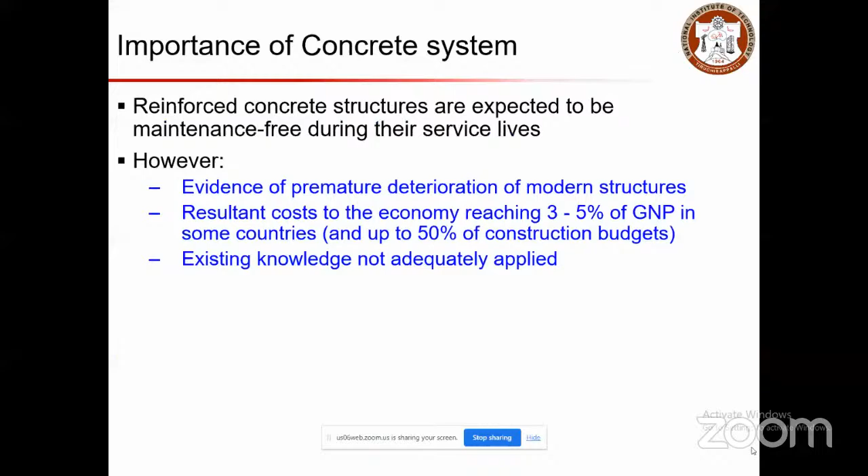Notification from one of my friends saying that it is not being moved.

So in the concrete system, when we talk about reinforced concrete members, the rebar will be placed inside the concrete. We typically cover the rebar like this, placed inside the concrete, and then you have your concrete placed here. The concrete is going to basically cover your rebar, and that is why we call this region the cover concrete.

Depending on the severity, you vary or increase the cover depth, because if you increase it too high, then it is not good for your concrete. Why? Your concrete is weak in tension and good in compression. So as you increase the depth, that concrete region may not withstand the tensile stress, then you may end up having a lot of spalling in the cover concrete region itself.

So when the cover concrete region spalls, that is going to expose your rebar to the outside environment, and then the aggressive agents would react and affect your rebar to induce durability issues. That is what is being illustrated here.

So this dotted line basically indicates the region that is outside. Here you have the concrete surface. This is going to be exposed to the region where your concrete may get dry, and the water inside the concrete mix may get evaporated over time. At the same time, from the outside environment, you may have ingress of aggressive agents like chlorides, water, or carbon dioxide that can come in and react or attack your rebar.

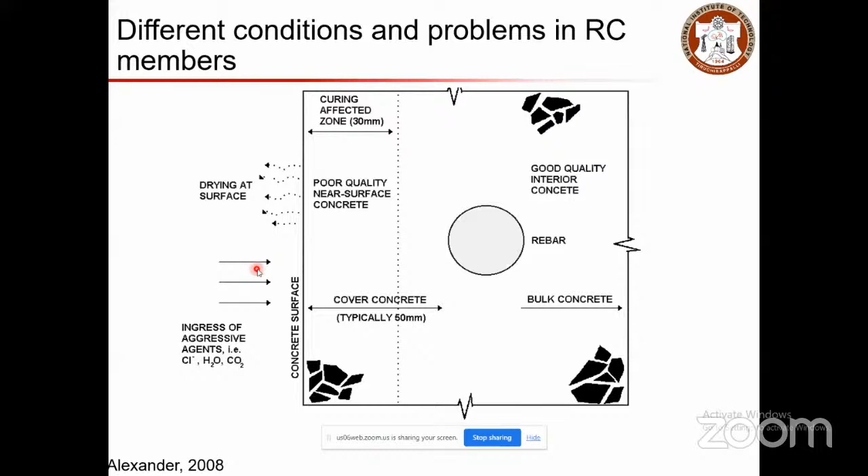Inside we typically call it bulk concrete or core concrete, which will have good strength compared to the cover concrete. So we need to understand that irrespective of region, out or in, the quality of the concrete should be good. That can only be achieved if you provide adequate curing to enhance the performance for sustainable structures, and good quality materials should be used.

Which helps you achieve the required conditions. So we can divide into two categories. One is the concrete system, which depends on materials - the type of binders or cement contents, aggregates, admixtures, and of course the mix design and proportions used to achieve the target goal. At the same time, the process used to mix your concrete and transport it from one place to another, compact it, curing, temperature, and workmanship - everything will have its impact on performance.

When you consider the environment, we can categorize into two categories: physical and chemical. Physical conditions could be due to abrasion, erosion, cavitation, and freeze-thaw cycles. Chemical conditions involve dissolution, leaching, expansion, and alteration. This is because of the aggressive agents that get into concrete, which may result in these various conditions.

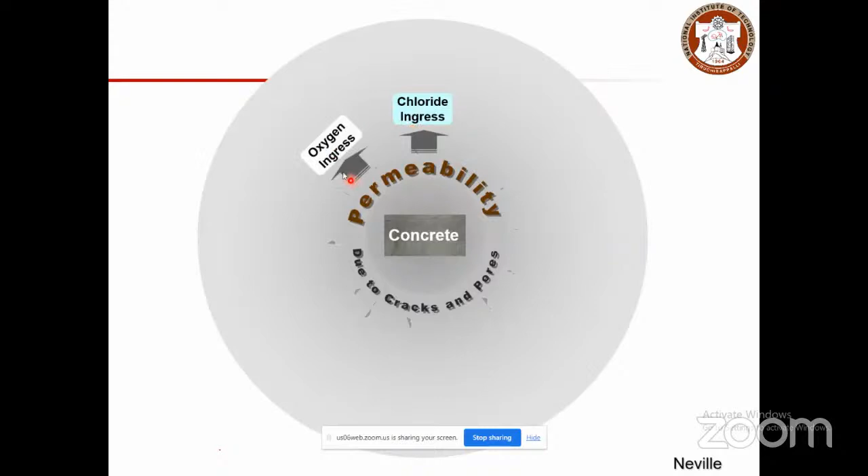So when you talk about concrete, this is from the book. Concrete structures are all porous - it is a highly heterogeneous material. The pore connectivity will lead to permeability, and if the concrete cracks, you can see mild crack formations. If the concrete cracks, that may lead to chloride ingress and oxygen ingress to your material, and then depending on environmental conditions, you may have saltwater penetration, carbonation, and water saturation.

These are external conditions. And if you talk about the pores and cracks, the materials that you have may have some alkali content in cement, and may also have some inferior ingredients that we use in concrete.

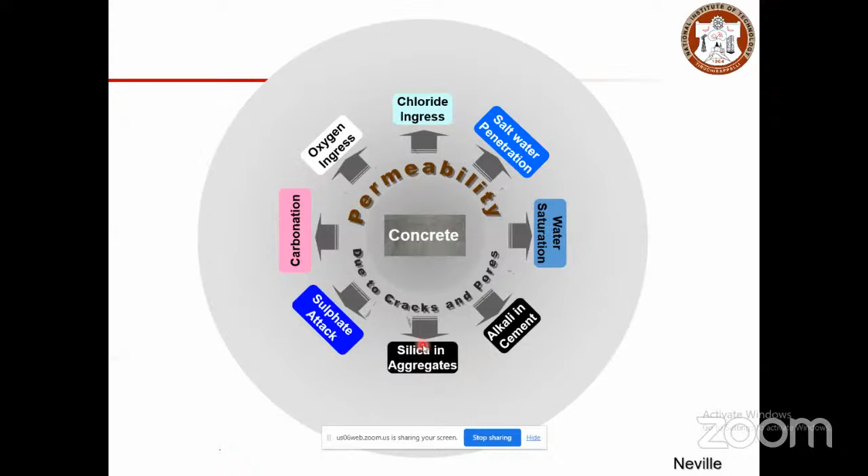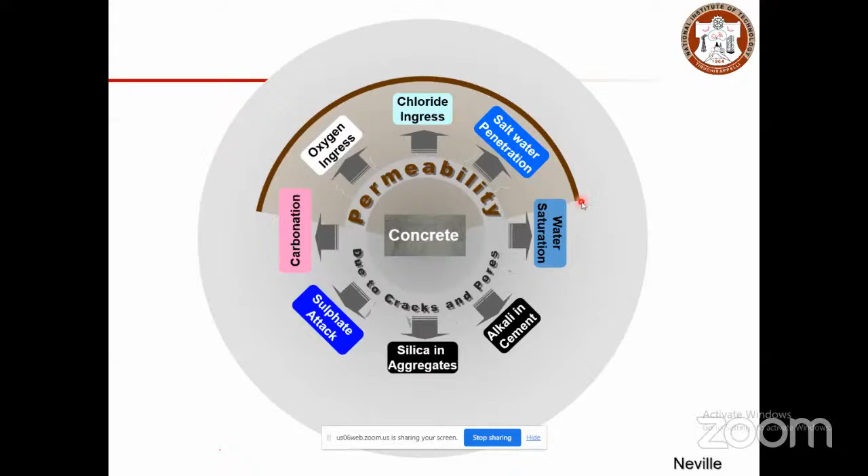So the cement will have alkali in it. The aggregates may have silica in it, and depending on the favorable conditions, you may end up having a sulfate attack as well. So these things, when you have the combination of oxygen ingress, chloride ingress, salt water penetration, carbonation, that may lead to corrosion issues.

Whereas if you look at the water, alkali, silica in these combinations, this may result in alkali aggregate reaction, ASR conditions. On the other hand, if you have only water saturation, that may result in leaching, and when you have sulfate attack, that may result in concrete expansion, and eventually that is going to crack your matrix. So the cracking will be there, and that is going to result in strength loss, and once that is lost, the material is going to slowly deteriorate.

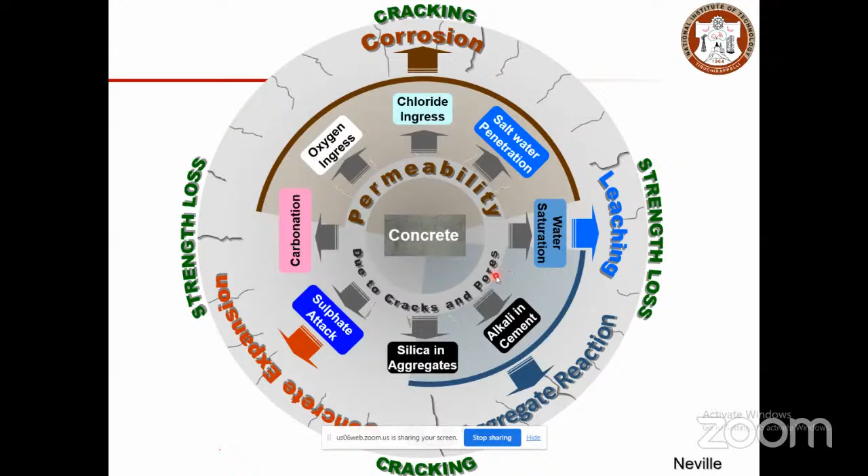So what is the common cause of deterioration in materials? Sometimes we are not so aware. This is from Professor Basheer, UK. Based on the findings, about 33 percent of the major contributions are due to corrosion effects. External chlorides induce deterioration, and the rest were mainly contributed by shrinkage effects, corrosion due to carbonation, alkali aggregate reactions, abrasion and erosion. So the major causes would be corrosion due to external chlorides, corrosion due to carbonation, and corrosion due to inbuilt chlorides. That is going to influence the durability performance a lot.

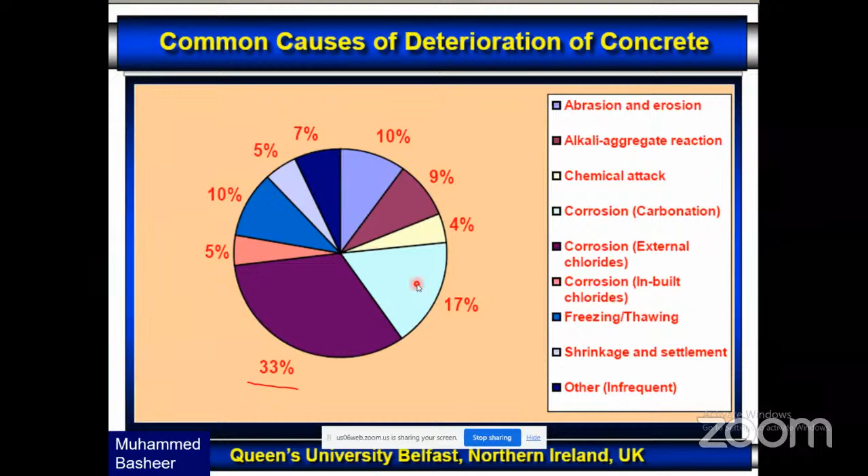So you might have observed in your day-to-day life the structures that surround you. Corrosion will be one of the common issues that you can find. So what are the factors that contribute to such concrete deterioration?

One is low cover. Typically, to save material, people don't provide adequate cover as required for a particular scenario or condition. When you tend to provide low cover considering cost and other factors, you may save cost in the initial stage, but at the end, when you look at the overall life cycle or lifespan of your structure, you may need to spend a lot of money at certain intervals to enhance the performance. So low cover is not good, you need to provide adequate cover. Low cover or high cover, both extremes are not good. You need to know what is the adequate cover for the particular scenario, and that needs to be provided.

And then poor quality concrete, poor design detailing, poor workmanship, wrong specifications, failure of joint waterproofing, and wrong material selection. All this is because of the awareness that we have with our design people or site people, and the workmanship.

So the designers will think this will work, but when it goes to the site, the site engineers may not be knowing what exactly the designer thought and included, and there will be a compromise in the performance. Especially at the end, who is going to construct it? The layman is going to do construction, and you may observe that if the concrete is not flowable, the layman doesn't even think, he just pours water to make the concrete more flowable, but he doesn't know what he's doing. That is going to change the entire material composition and design, and that is going to affect the strength and durability of the material. So at the end, it is in the hands of the people who are going to do the construction. That's where the major issue comes: poor workmanship and wrong specifications.

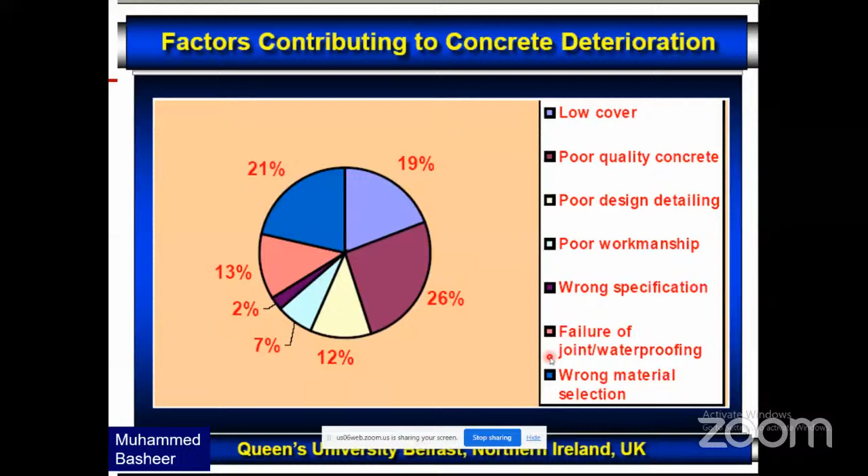So what do we need to consider? We need to choose a balanced approach to enhance the service life. When you talk about the balanced approach, we need to take care of steel. Of course, we are thinking that the steel is being taken care of by the cover concrete, by covering the concrete on top of it. But we are not taking care of the cover concrete. So when you need to look at the service life, it has to be balanced. You need to take care of the steel as well as the concrete.

So the steel with enhanced resistance against corrosion, and the concrete, that is specifically the cover concrete with enhanced resistance against the ingress of deleterious elements. So this is what's considered synergetic effects to look at.

So why concrete? You might be curious to know why concrete is used tremendously in construction. That's because the price of concrete is one of the cheaper materials that serves all purposes. This is the range given, showing annual production in tons per year, ranging from titanium, aluminum, steel, wood, bricks, to concrete. So concrete production is enormous, and the cost is also less.

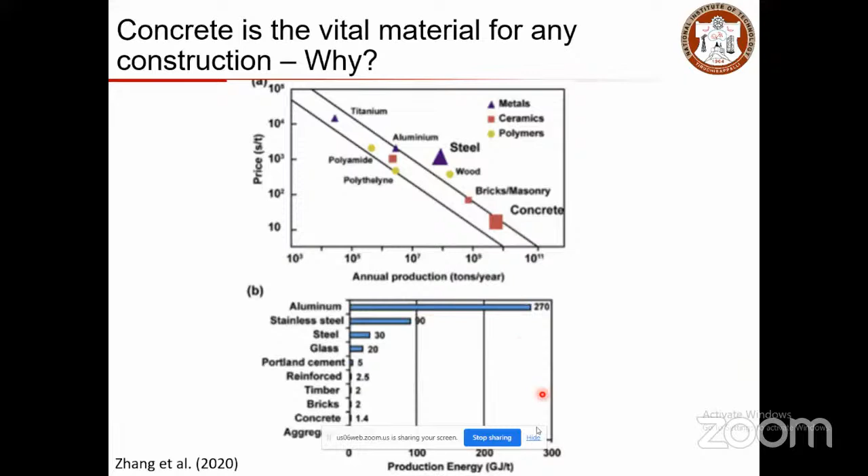If you look at the energy required, it's also less compared to other materials. So the thing to note is that...

to produce concrete, you need to have cement. The cement demand across the globe is given here. You can see the prediction over the decades, ranging from 1990 to 2050. China is the highest cement producer, and then other developing countries together contribute to this demand.

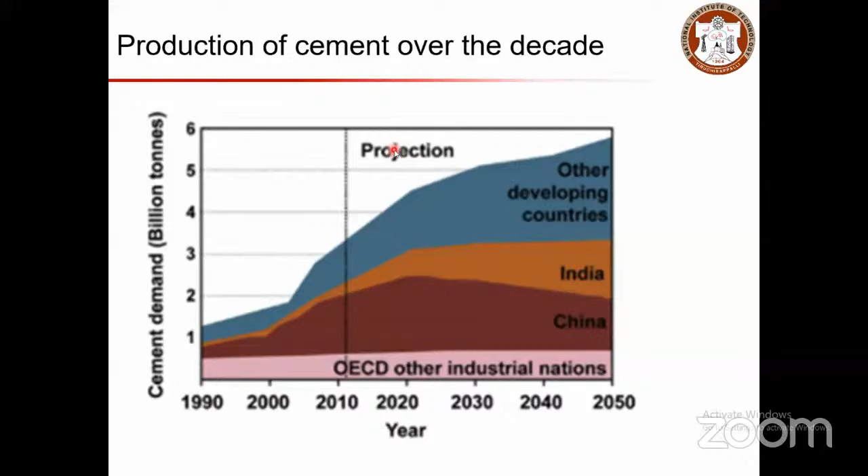So the point here is that cement production is enormous, and likewise the CO2 emissions from cement are also enormous. When we talk about the attributes of concrete, it is the second highest consumed material next to water. So imagine how significantly we use concrete in all our structures, and the amount of cement that goes in, and the CO2 emissions associated with it.

This is why sustainability is being discussed - how well we can reduce CO2 emissions from cement and make the material more sustainable.

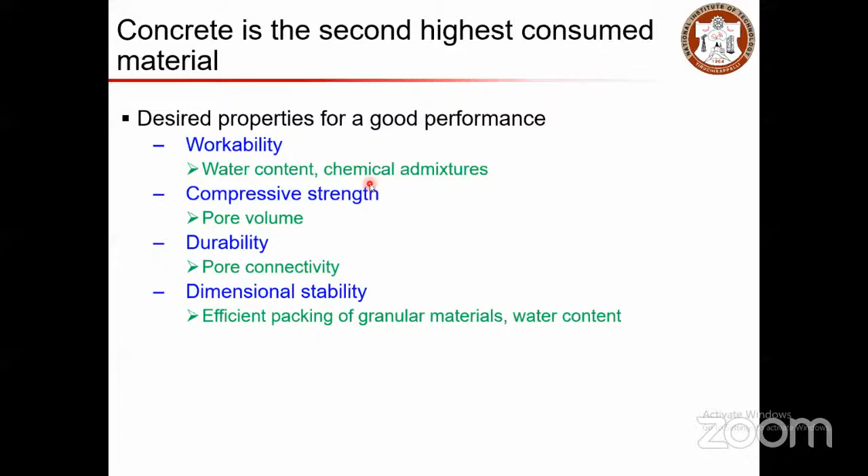So what are the desirable qualities? You need to enhance the workability of concrete. For any concrete to perform well, the fresh property is workability, and then compressive strength, durability, and dimensional stability. These are the primary properties of concrete.

To adequately develop infrastructure, concrete has taken various forms - ranging from normal concrete, to high performance concrete which increases strength, and ultra high performance concrete where strength can be tremendously increased so that the size of the member can be reduced to save load and cost. Then we have precast concrete systems, self-healing concrete, and 3D printing concrete.

And what about reinforcements? In reinforcements also we have various evolutions, starting from conventional steel rebars, then coated steel rebars, then FRP bars and strands, and pre-stressing strands.

So normal strength concrete - I don't need to give you any definitions, you might already know what normal strength concrete is. So I'll focus on high performance concrete. You might be knowing what supplementary cementitious materials are, right?

There are materials that possess certain characteristics of reaction in the presence of water that produce a hydration product similar to cement. This is what we call supplementary cementitious material, and the whole reaction is what we call pozzolanic reaction. The material that attributes this pozzolanic reaction is called pozzolanic mineral admixture, such as fly ash, GGBS, rice husk ash, silica fume, metakaolin, and POFA.

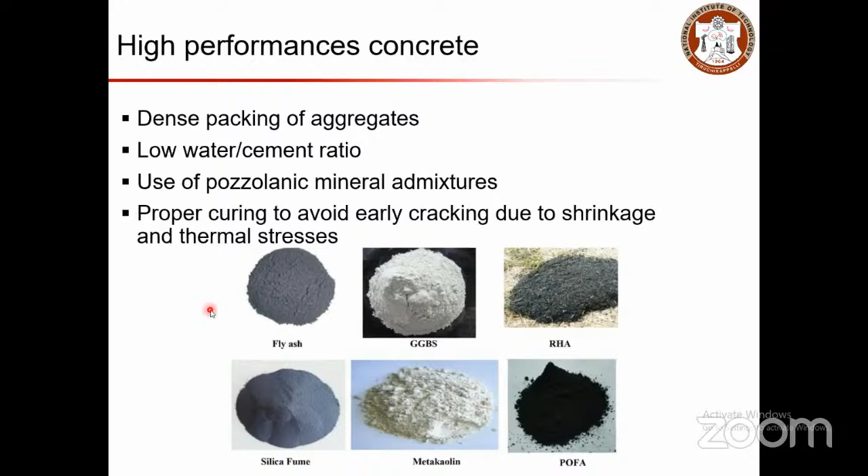The advantage of using such materials is that some are finer than cement particles, so they fill in the pores and help you get a densely packed structure. Some materials react with the calcium hydroxide in cement and produce additional CSH, which helps with pore refinement and a denser matrix. This requires proper curing to avoid early cracking due to shrinkage and thermal stresses, because when you use such materials, that needs to be taken care of properly.

Then you have ultra high performance concrete, which is based on cementitious composite material with certain discontinuous fiber reinforcement placed. The strength is typically in the range of above 120 MPa.

Nowadays ultra high performance concretes are being used enormously for constructing high-rise buildings, so the size of the members can be reduced significantly when you move with UHPC, helping to reduce the overall dead load of the structure. The pre and post cracking tensile strength would be above 10 MPa, and this gives enhanced durability, because as the strength increases, the stiffness of the material also increases, and the material behaves more stiffly.

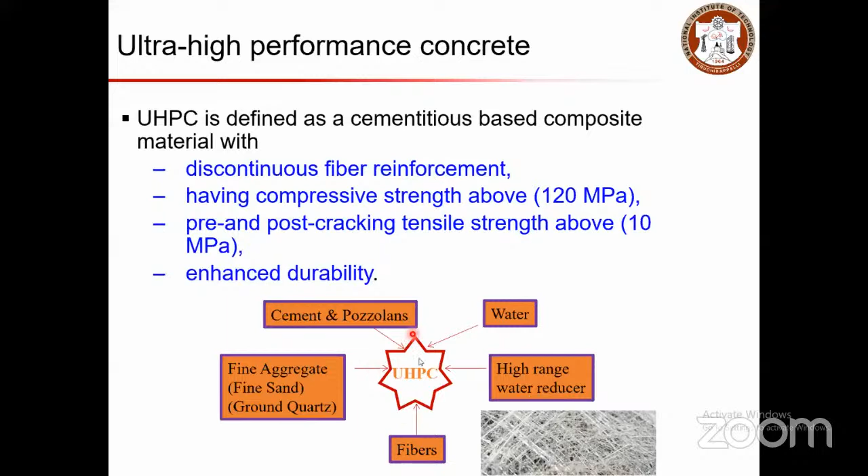Adding fibers helps bridge the cracks and enhances the toughness of the material. That combination helps achieve ultra high performance concrete, typically a combination of cement, pozzolans, and water. To achieve high strength, the water-cement ratio needs to be lower, so you need high range water reducers and fine aggregates. You typically reduce the coarse aggregates when going with high performance concrete, and add fibers to enhance quality.

Let us compare the performance of conventional concrete, high performance concrete, and ultra high performance concrete. The strength for conventional concrete is in the range of 20 to 50, for high performance concrete it is about 80, and for ultra high performance concrete, such as reactive powder concrete, it is about 200 MPa.

Flexural strength is 2 to 4 for conventional concrete, 7 for high performance, and ultra high performance concrete is about 10 times the conventional strength. Modulus of elasticity is in the range of 30 for conventional, 40 for high performance, and about 60, twice the conventional value, for ultra high performance concrete.

These structures are very helpful when you need abrasive wear resistance. In such scenarios, water absorption will be 7 times slower, rate of corrosion will be 8 times slower, and chloride ion diffusion will also be lesser.

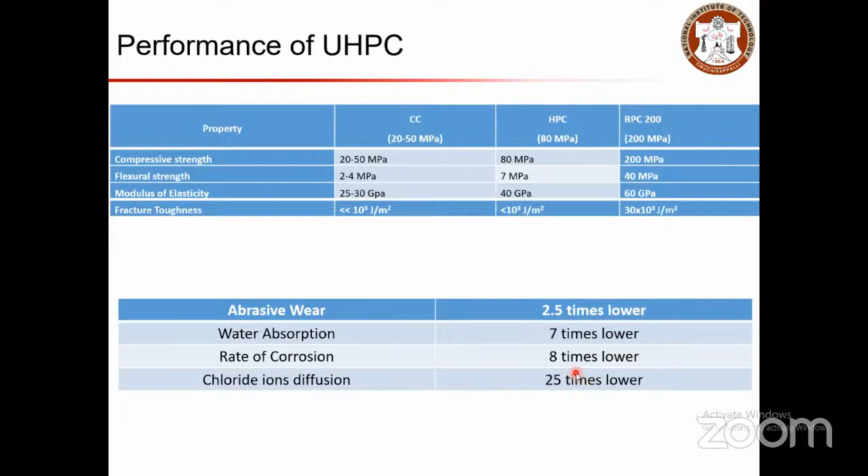So fibers basically help enhance the performance, as expressed here. The concrete has a major role, and the fibers start bridging the cracks, which increases the toughness in the material.

Now let us talk about self-healing concrete. What is so special about it? Especially for structures like bridges, you construct them to last 100 plus years, but after 10 or 15 years, you start observing issues due to material, construction, or insufficient design appropriateness. In such cases, self-healing concrete repairs itself. How does it repair on its own?

There are two types of healing: autogenous and autonomous. Autogenous healing is about the inherent ability of the material to heal itself. In cementitious materials, not all cement particles get completely hydrated during the process; there remain some unhydrated particles. When there is a crack, these unhydrated particles become exposed, and especially in the presence of water, they react and form further gels to fill up the crack. That is autogenous healing.

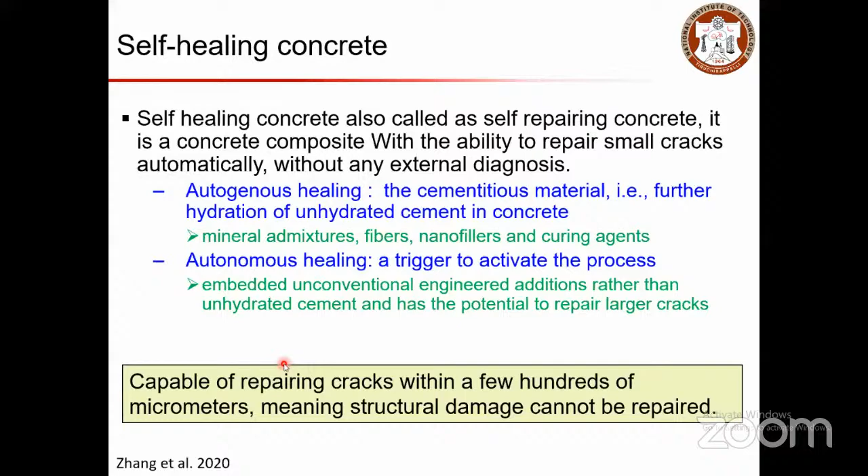Looking at the mechanism of autogenous healing, we can classify it into three categories: physical cause, chemical cause, and mechanical cause. The physical cause is basically swelling, some material gets in and swells. As it reacts, hydration continues, producing more hydration products which fill up the crack.

For mechanical causes, in the presence of water, fine particles break off and accumulate over time, eventually filling up the crack region.

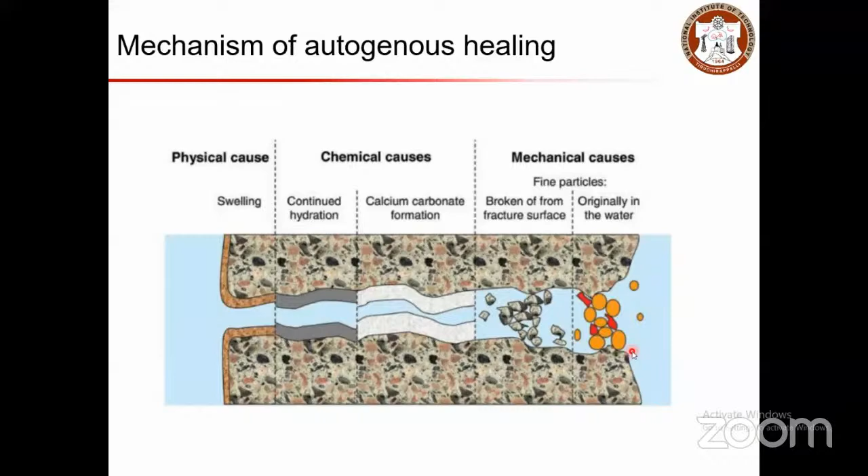If you look at the external categories, the performance of healing materials in self-healing concrete is that you can have concrete with mineral admixtures. The crack after damage is induced, and then you can see the expansive agents. You can see some geomaterial swell that can eventually swell and fill up the crack, and these expansive material agents and geomaterials eventually fill the crack completely.

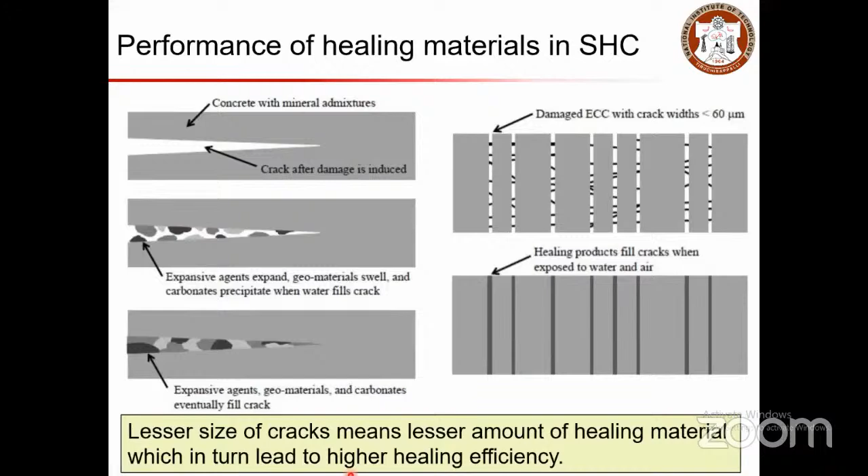Similarly, here you have damaged ECC with crack less than 60 micrometers. In this case, if you have a healing product that would fill up the cracks when exposed to water and air, this is how your structure is going to look. So the lesser the size of cracks, the lesser the amount of healing material required, which in turn leads to higher healing efficiency. The self-healing concrete concept works better when you have smaller cracks, and over time the smaller crack will be controlled, which helps prevent crack growth or severe crack formation.

So what is the latest technology that we use? The current practice is 3D printing concrete technology. We tend to print or get some 3D models commercially available for all applications. So when you look at our civil engineering applications, is it possible to print a house or a model, something that huge, in a real scenario?

If we talked about these things 20 or 30 years back, people might have said it's a big no. It all starts with small innovations and connecting things here and there. That's how stereolithography and fused deposition prevailed in the 1980s, but in those times that was not popular in the construction industry. And Khoshnevis, he is the pioneer in this area called contour crafting. He related the potential of this additive manufacturing technology to the construction field.

Later, a lot of people started working on how this technology would be helpful for the construction field, and they came up with extrusion-based 3D printing models where cementitious materials are passed through a nozzle and sprayed or deposited as required. In 2014, WinSun printed two-story building houses in a Chinese construction company.

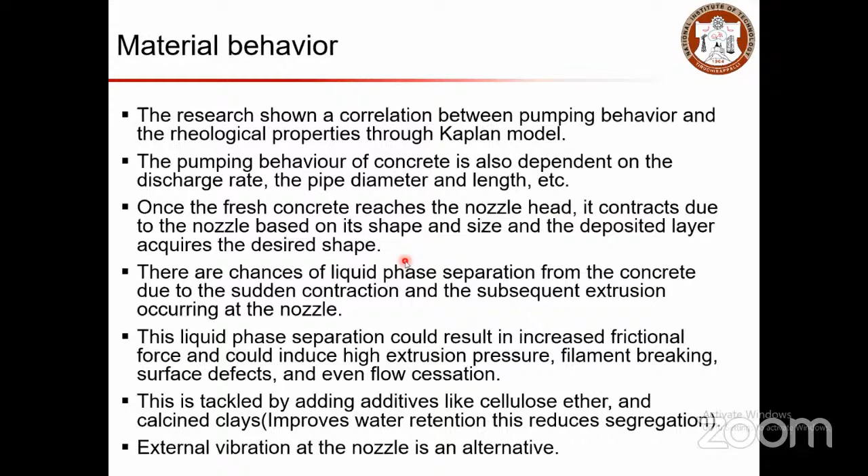How does this work? This is based on rheology, and you need to customize the rheology of the material. The additive materials used in the cementitious material should have free flowability, so that when you spray the concrete it can freely flow. It comes through the nozzle and is placed into the layers and required shapes.

If you look at the material behavior, yield stress and viscosity are the two primary properties we need to look at, which should be low during pumping, while immediately after deposition, yield stress should be of a higher magnitude. This is achieved by adding an additive. The additives should control the flowability of the mix coming through the nozzle, which increases yield stress and elastic modulus. Accelerators can be added so that strength gain will be significantly high, so the layers can withstand their own weight once they've achieved strength.

The most common method for assessing extrudability is based on printing a filament layer. In that case, you can visually examine the layers as well, checking for any sign of blockage, tears, or discontinuity. The buildability depends on the number of layers constructed for the printed formation.

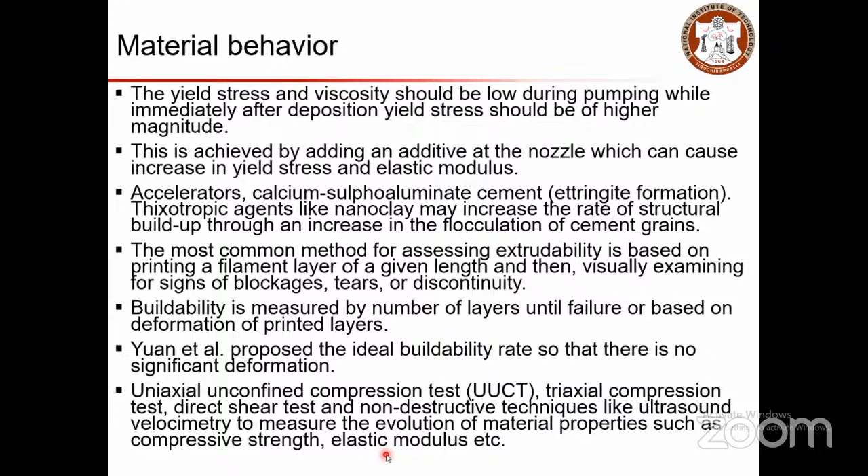There are test methods available to check the conditions and ensure the performance of the additives coming through the nozzle is appropriate or not.

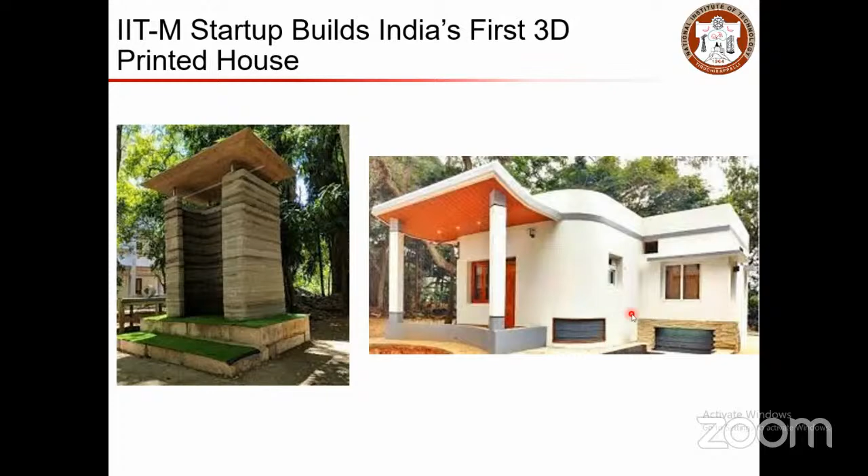Recently, you might be aware of India's first 3D printed post office, constructed in Bangalore by L&T Construction. It is a 1,100 square feet structure which was constructed for about 23 lakhs in 45 days.

The advantage of this 3D printing technology is that you can construct the building in very few days, but the planning and designing should be done properly to execute the things. When it comes to the execution stage, you can implement it in a very short span, and the cost involved is also less, because you optimize the materials and cut down the labor requirement. Another major advantage is the aesthetic appeal of the structures.

You can use the best of concrete when you go with 3D printing, because concrete is good in compression. When you curve it or do these abstractions, you are making use of this compression effect, so you are better utilizing the concrete. At the same time, you are enhancing the aesthetic appearance of your structure.

There is another footbridge in ETH Zurich. You can see the shape of the structures, how unique these structures are. Similarly, nowadays a lot of 3D printed structures are being constructed, and the largest bridge has been constructed in China.

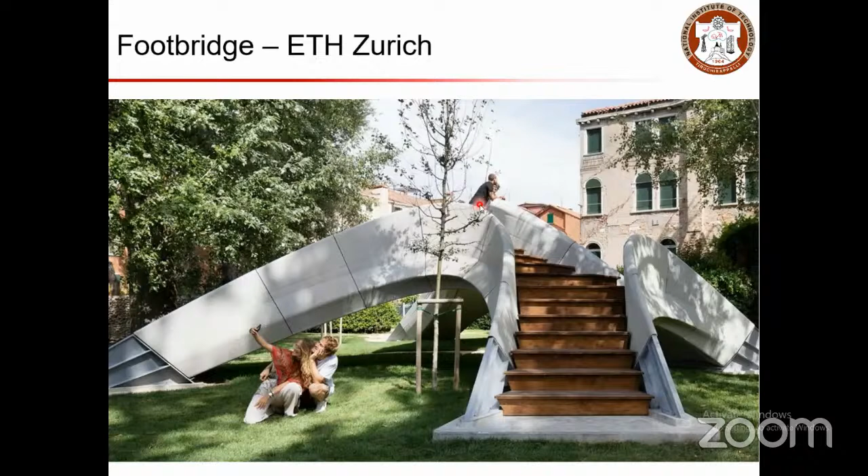The whole concept here is that when you go with such things, initially you may not be using reinforcement, and you are reducing the cement content as well. These things will eventually lead to approaching sustainability practices. So this is with the concrete.

Now let us look at certain practices that we can adapt for steel rebars that will be helpful to meet the quality conditions or assurance. Sustainability comes when you do proper quality control and assurance, because by doing it you are making sure the structure is going to stand for a long period without any energy required from the surroundings, or without any harm to the external surroundings or trouble that would affect the functionality of your structure.

Now we'll look at the thermomechanically treated or quenched self-tempered bars. You might all be aware of what a TMT bar is, and many of you know how TMT bars are manufactured and what are the key things to look at. In sum, I will quickly tell you the process involved in the making of TMT, and what we need to look at when we need to qualify or assure the quality of your TMT bar.

You can see this process table. The temperature will initially be increased significantly high, then it will be quenched, then kept in atmospheric condition so it will be tempered. By doing this process, you can immediately see the effect of this whole temperature process.

After rolling, both the surface and core material will be austenite. In the quenching process, the surface becomes immediately quenched, so that becomes martensite, while your core will still be in the austenite stage. When it is kept in the tempering bed, the temperature slowly moves from the inside to the surface, so the martensite becomes tempered martensite, while the core still remains austenite.

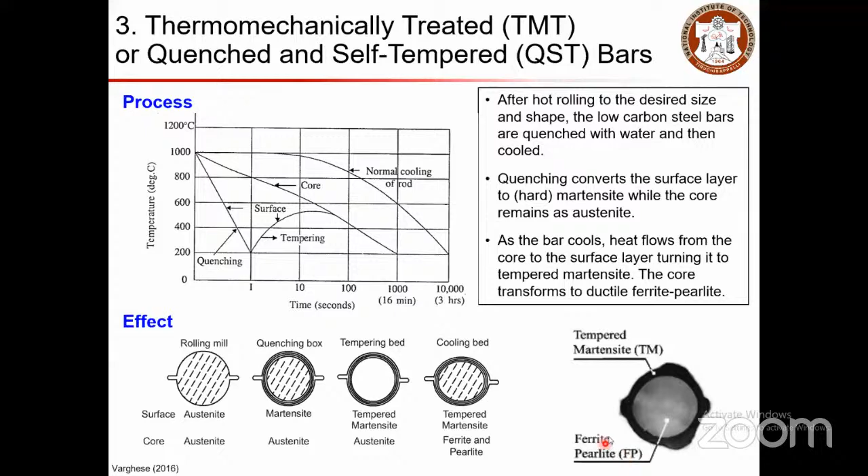This is what we call the TM ring. TM means tempered martensite, so it forms a ring around the core, which is what we call the TM ring. To qualify the TMT bar, we check for TM ring formation. Before getting into that, I'll briefly tell you the advantages.

When you go with TMT bars, compared to conventional bars, they have low cost and high strength, and mainly enormous ductility that is good for earthquake prone regions, with elongation about 18 to 30%. Since there is no cold working, it also provides better corrosion resistance.

So how do you identify or select TMT bars? You need to select only if the hardened periphery and soft core are uniform and concentric. For this check, I'll explain the TM ring test. You need to have the TM ring formation on the outer surface and the FP phase in the core, but there should be consistency within an allowable range.

Typically, the hardened phase is the TM ring, which should ideally be about 20 to 30% of the total cross section, and the inner section should be more than 60%, so that the ductility will be more. If it's not at the adequate level, you may compromise ductility. These things can be identified using the TM ring test.

So now, what is the TM ring test? For doing this test, you cut the rebar and place it in this form. You prepare the surface, cut it, polish it, and expose it to 5% Nital solution for 5 minutes.

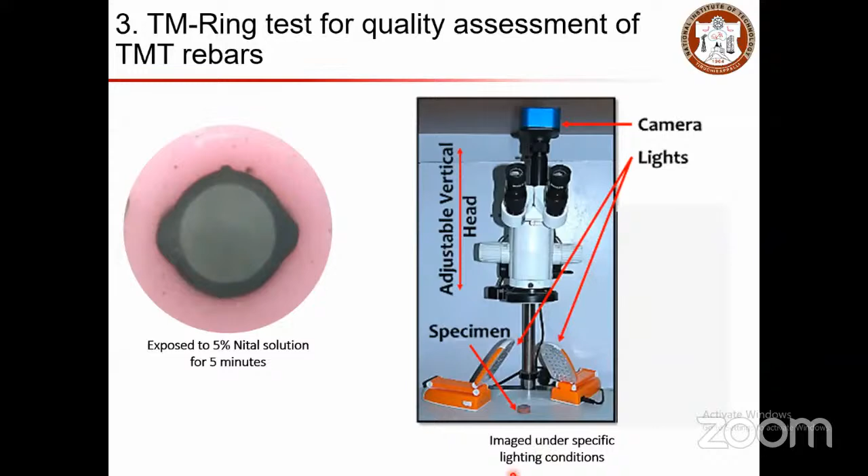Once you do that, you can see the phase distinguishing between the outer TM ring and the inner FP phase. To be more clear, you keep the prepared specimen under this testing setup, with arrangements for looking at the details. You have a camera and lights placed on it, so the image under specific lighting conditions will help you look at the TM outer and FP inner face.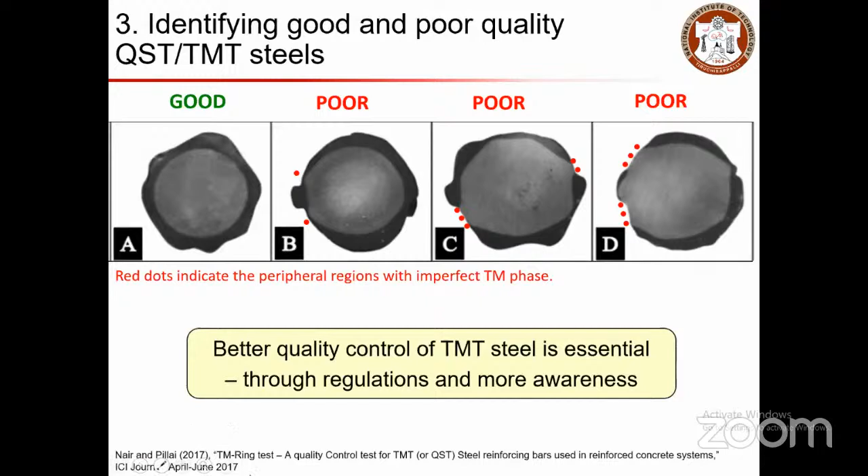So better quality control of TMT steel is essential through regulations and more awareness. Professor Pillai extensively works on this TMT quality assurance testing, and a test method is also proposed based on the same TM ring test, a quality control test for TMT bars.

We collected a lot of rebars from different manufacturers to check how well our bars are in the market. What we observed is that certain manufacturers are doing good, and the products from those manufacturers are satisfying the required conditions by providing a uniform TM ring with the proper soft FP.

Whereas for other manufacturers, the quality is not met, because the awareness has not reached well enough to ensure the phase should be in this range and the TM ring should be in this range. One interesting fact is that this is more irregular when the diameter of the rebar is less. As the diameter increases, this would be controlled a bit better.

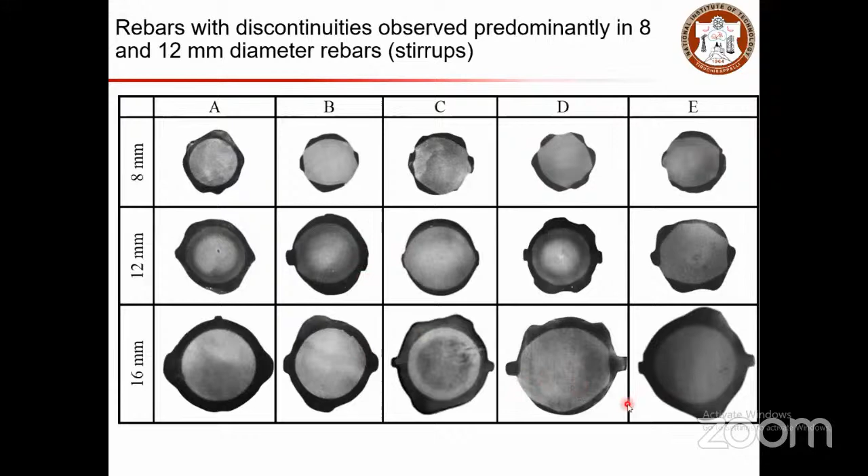Other than that, for these TM bars we need to have a surface cracking check. What we need to do is bend the bar and see if there is any cracking on the surface or not. So we bend the bars like this.

You can see the cross section here. This is a good cross sectional bar. When you bend a good cross sectional bar, you will not see any cracking on the surface. Whereas if the cross section is not good, that is, if the TM ring is not uniform, when you bend it, you will see a lot of severe cracks like this.

So this is going to affect the durability performance of your structure when these bars are going to be used in such applications. There is another thing to notice, that these bars are going to be used as stirrups also. When you use a stirrup, you bend the bars like this, and when you bend it, there will be a crack, right?

So as a quality control check, the code suggests you to bend at 135-degree angle, and if there is no crack, then it is good to be used as a shear stirrup. If there is a crack, then you need to be precautious, and you need to take additional care to prevent any issues, especially when you are going to use it in earthquake prone regions. So in such cases, these things are very crucial.

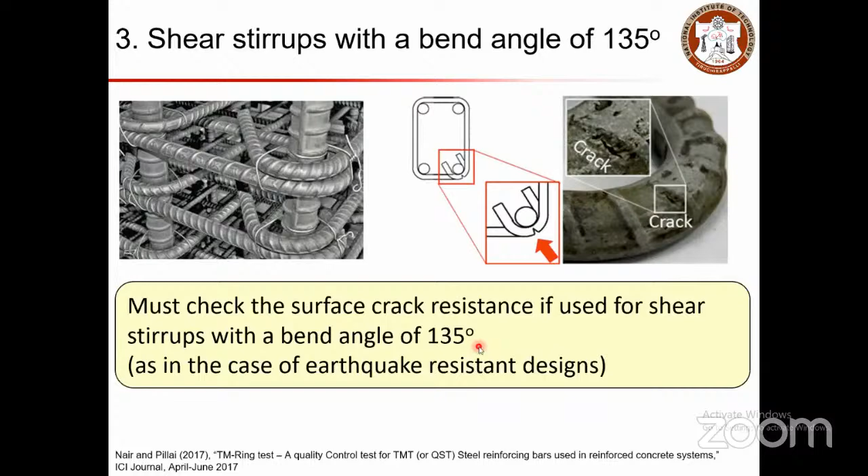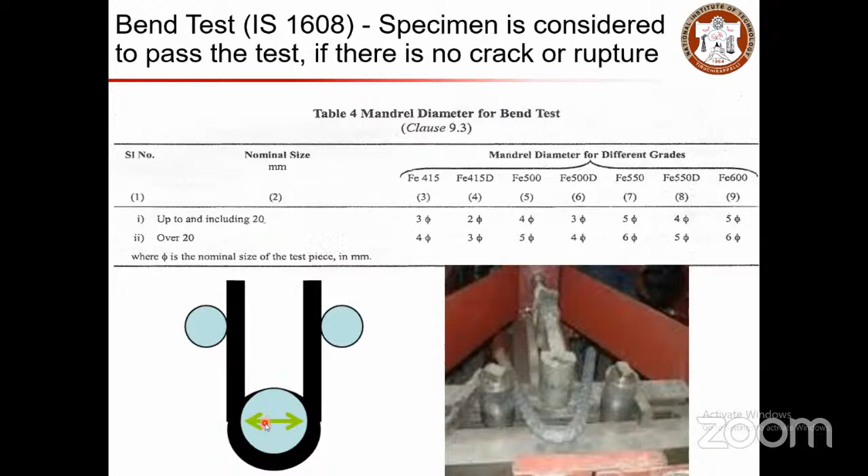So how do you do the bend test? IS 1608 gives you the specifications to do the bend test. The specimen is considered to pass the test if there is no crack or rupture. So you have a mandrel diameter like this. You keep your rebar going through that, and then you bend it to 135 degrees. The mandrel diameter should not be too large, so you have to keep a relationship between your rebar diameter and the mandrel diameter, which will induce the stress on the surface.

Now, another technology is that we know the conventional rebars, when exposed to chloride or moisture or oxygen, that is going to result in corrosion. So how can we control it better? We can coat it, and that's how this coated technology has come up.

It has come up as a protection mechanism. You can see here, this is your steel rebar, and then you have a coating, and then you have your concrete. So in this case, the protection mechanism is that first of all you have concrete as your cover to protect your rebar. In addition to that, you have a coating. So even if there is something that comes in through your concrete, you have your coating to protect your rebar from the external source. For example, if this coating is not there, if there is a hole or any path through which the aggressive agent can get in and reach your steel, that's where the problem comes.

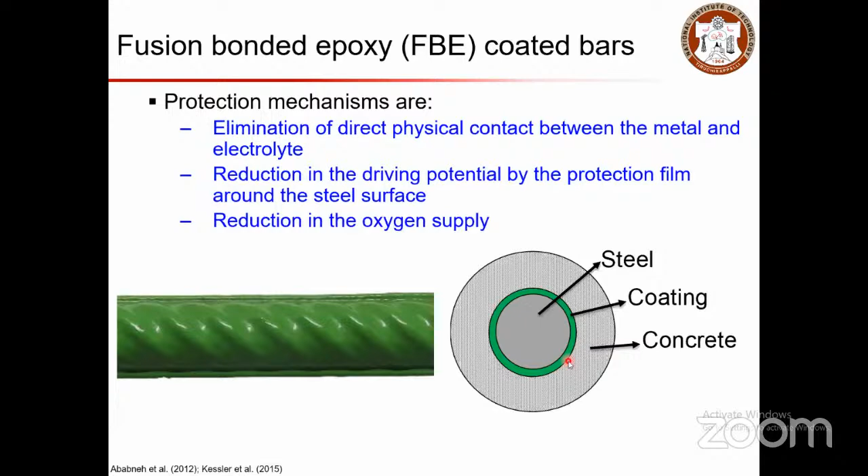We'll address those things in the coming slides. So the concept here is that the protection mechanism is to eliminate the direct contact between the metal and electrolyte, and reduce the reduction in the driving potential by the protection film around the steel surface. And in this case, when you have such arrangements, there will be a reduction in oxygen supply. So people thought these things will be very good to protect your steel, and this protection technology has come up. You can see a lot of manufacturers in India who use this FBE coating process as well.

So how is it being coated? Once you get your rebar, epoxy resin powder is ionized and attracted to the steel surface by electrostatic force. Then you do water quenching in a thermosetting polymer. And then you inspect. So here this person is doing inspection for holiday or damage. Holiday is not the holiday that we usually take, it is the name given to pinholes or micro damages, which need to be inspected.

So for a certain length, you have some allowable limit of the holidays or damage to have, that is less than 1.1% or something. If it is more, then that is going to accelerate the corrosion in a negative way. Here is the microscopic image of the coated surface. You can see small pinholes, these are called the damages or the holidays.

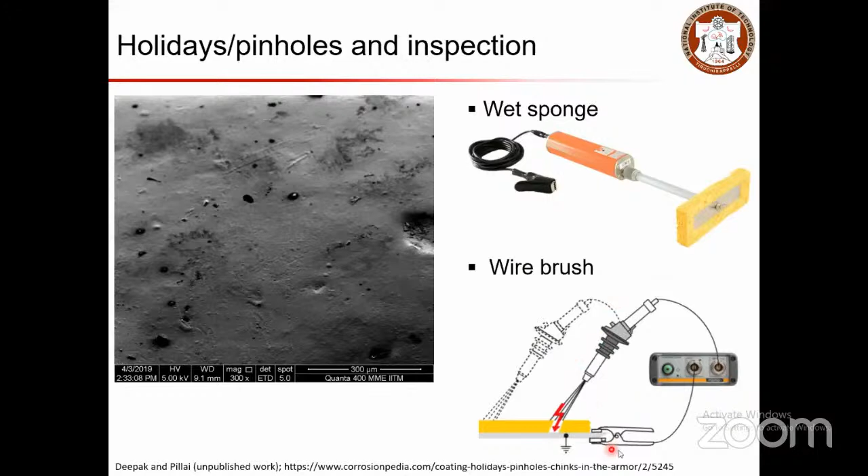So when you do inspect, how do you do it? You have a wet sponge, and then you have this wire brush, and this will be connected to it, and then you check it, and this will indicate the damages on the surface. There are a lot of poor practices also we observed in site.

Mostly rebars are cut at site. When you cut at the site, if the coating thickness is more, there is a possibility it may get peeled off. If it is peeled off, people may not think further, they just tend to fix it then and there and recoat it.

And the recoating is going to affect the performance mostly. So the cut surface is applied using a simple paintbrush, at site at ambient temperature conditions. Fusion bonding will not occur at ambient temperature conditions, so these things will not serve the purpose.

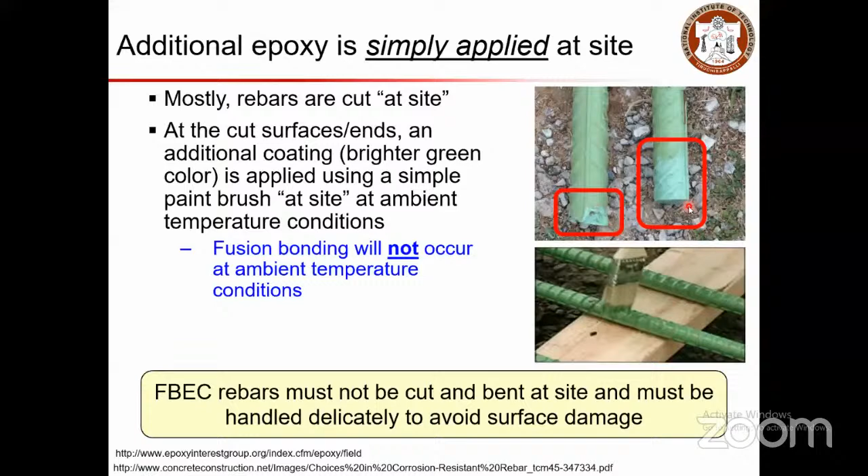So the advice is that FBEC rebars must not be cut and bent at the site and must be handled delicately to avoid surface damages. Typically manufacturers supply the materials in the required bent angle, or if you need the bars as stirrups, you can give your specifications. They can bend the bars to the required geometry in the manufacturer unit itself, because they do all the process before the coating. The bending is done before the coating, so that once it is bent, it is easy and smooth to coat, and the coat will stay further.

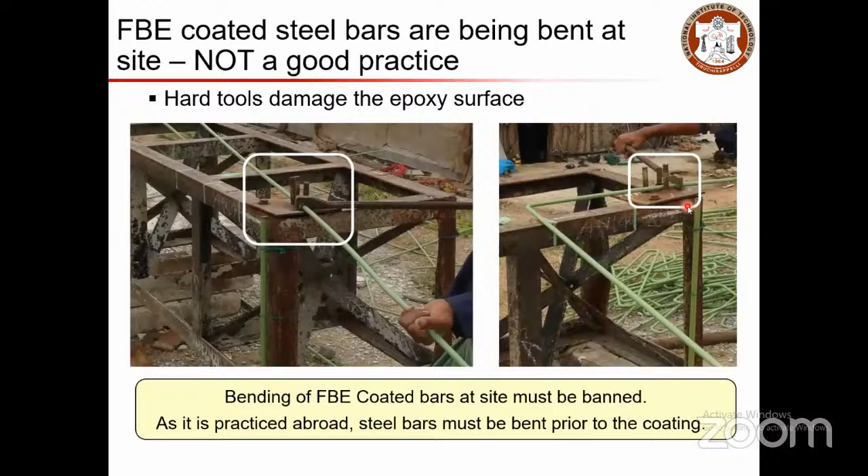But here you can see you have a straight bar, and practitioners just want to use this as stirrups, and they are bending it at the site. When you bend it, the bent regions are going to crack because you have epoxy material on top of the steel, and when you bend it, the steel can withstand the bend but the coating cannot, and that causes cracking on the surface. When you have such cracking, it accelerates the corrosion process by inducing more anode cathode, or the ratio between anode and cathode will be higher, and that accelerates the problem.

So additional epoxy coating using a simple paintbrush at ambient temperature does not lead to fusion bonding, and it should be avoided. There is a study which looks at this.

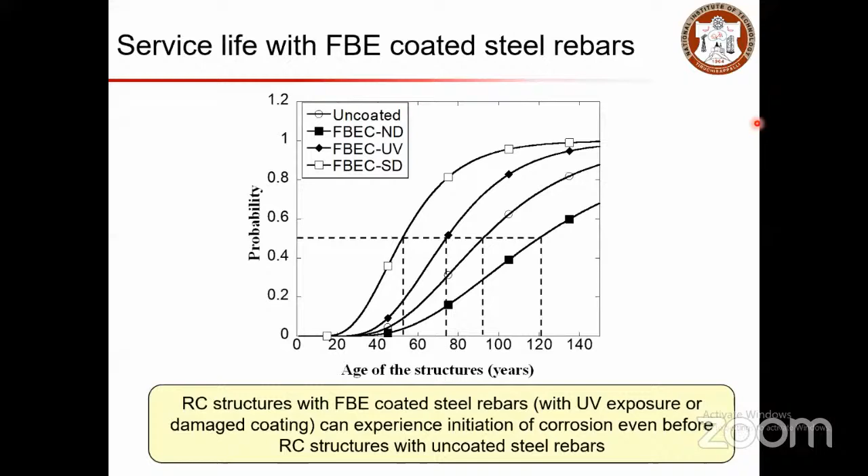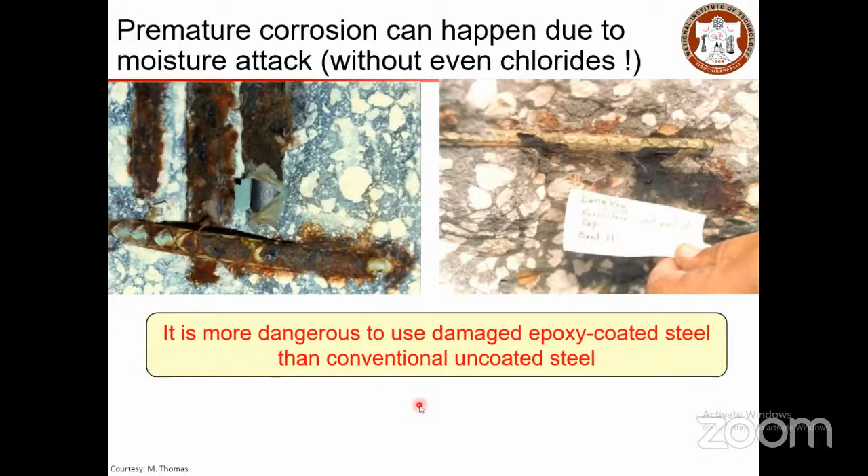So that the consequence will be less compared to the consequences of using rebar with damages. Here you can see some premature corrosion happened due to such poor practices of epoxy coating bars. It is more dangerous to use damaged epoxy coated steel bars than conventional uncoated steel bars.

In addition to that, nowadays we are working a lot using GFRP bars. The GFRP bars technology is part of regular construction practices in many developed countries, but in our country we are yet to adapt such GFRP or FRP bar usage in our construction practices. We have a building code in process soon that will be released, which gives specifications and test methods for GFRP bars from BIS.

So you can see here how do you manufacture the GFRP bars. You have the fibers, you have polymer matrix, and you place these things together and you get the FRP composite. So unlike steel rebar, the conventional rebar, your FRP bars are a composite material, and it depends on the material properties of the two different matrix of fibers and polymers.

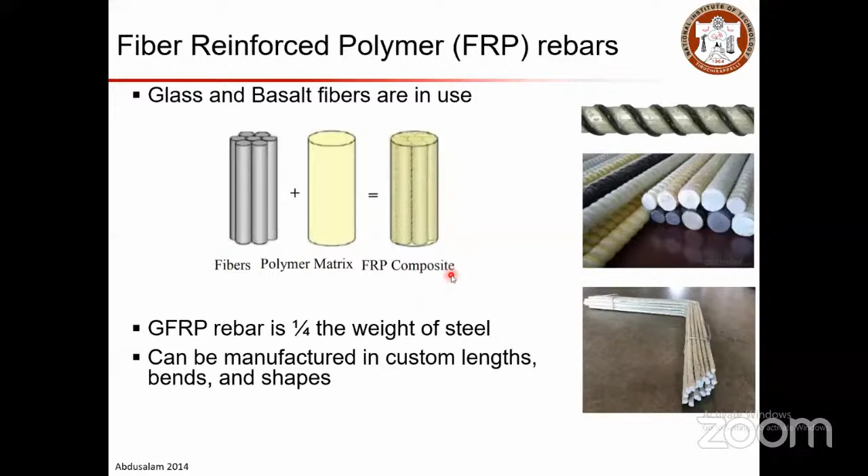But the advantage is that you can have less weight. The GFRP is lightweight, and it can be customized to any length, bends and shape. This is one of the alternative solutions when corrosion is the issue. It's non-conductive to electricity and heat, and brittle, non-metallic, and the concern is the chemical attack that it will be undergoing.

So when it is a highly alkaline environment, the performance of GFRP is a bit uncertain. Otherwise, where corrosion is the issue, GFRP bars can be used. There are some projects that started using GFRP bars for non-structural applications. Soon this can be used in structural applications as well, with certain conditions.

Let us compare the cost variations between the different rebars. When you have conventional steel rebar, the cost ratio will be 1. As the performance increases, if you are providing corrosion resistant steels, coated bars, galvanized bars, or GFRP bars, the cost will tend to increase. When you use GFRP bars, you may have 3 times the cost of conventional bars. When you use solid stainless steel, the cost will be even higher.

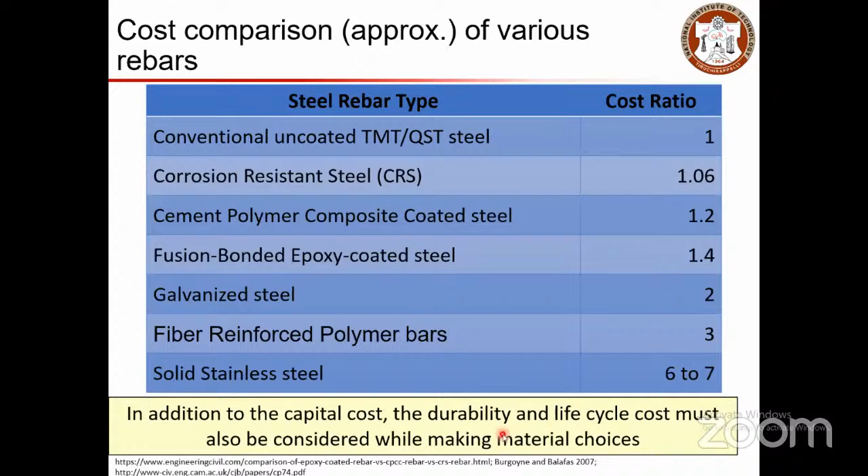These choices can be made keeping the capital cost in mind and the importance and significance of the performance of the structure. So though you spend more money in the initial capital cost, you may save a lot of materials considering the overall life cycle of the structures. The durability and life cycle cost must also be considered while choosing materials. This is the key takeaway: you need to know which material performs better for certain applications. You should not think about cost as the only criteria in the initial stage, because you should look at the holistic performance of your structures and the life cycle cost.

I'll just briefly touch upon the concept of pre-tensioned concrete. So far we have looked at the various materials we use in construction, in terms of concrete and steel. Now let's see what pre-stressed concrete applications are about. Some of you might be handling pre-stressed concrete technology. You can see how tremendously pre-stressed concrete technology has evolved from the 1950s to the current scenario.

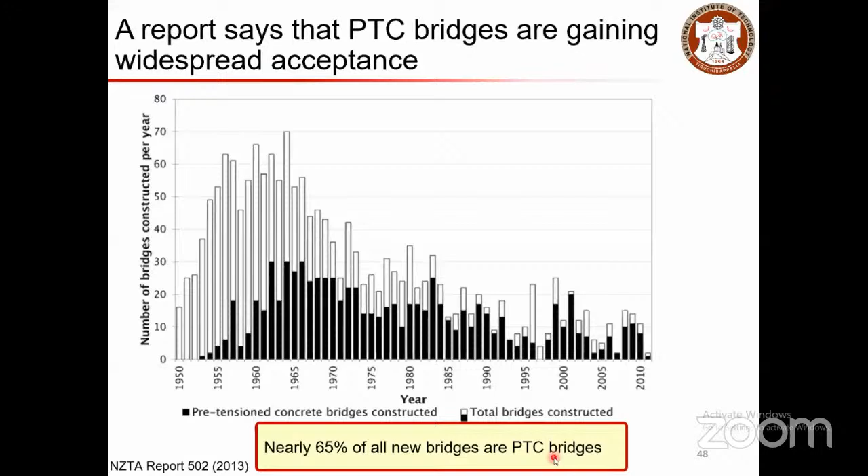Nearly 65% of all new bridges are constructed using pre-tensioned concrete technology, owing to its advantages of allowing long members, slender members, and reducing cracks.

But then we have observed certain issues with the pre-tension concrete system itself. This is one of the bridges connecting Pune to Mumbai that has a lot of shear cracks forming in all the girders, almost along the entire length of the span. So what could be the reason? Unless we examine these structures, we cannot provide a solid reason. But looking at the possibilities, it could be due to poor construction practices, or especially since it's a shear region, the shear contribution will be less. That could be governed by the transmission length and bond strength aspect.

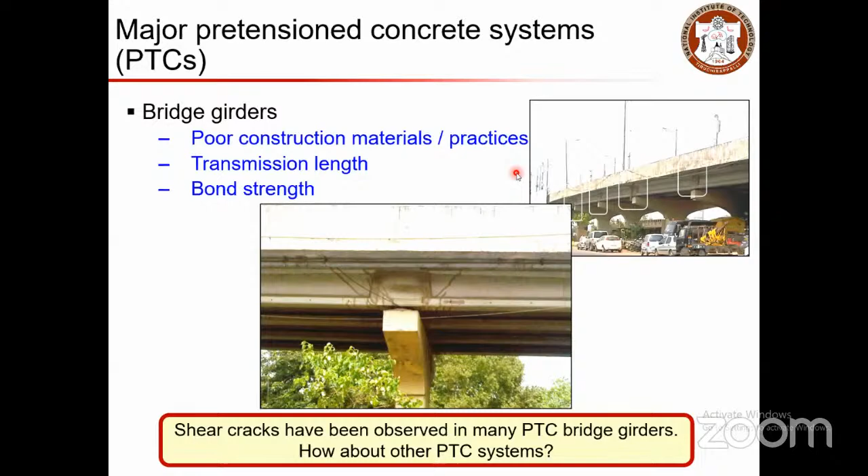If this is the case for pre-tension concrete bridges, how about a similar scenario for other pre-tension systems? Another common application of this technology is in hollow core slabs, used in commercial buildings or high-rise buildings. One thing we have observed is that the code recommendations are not updated. The existing codes or test methods have their limitations. We need to come up with a method that can better estimate transmission length and bond strength so that such scenarios can be controlled.

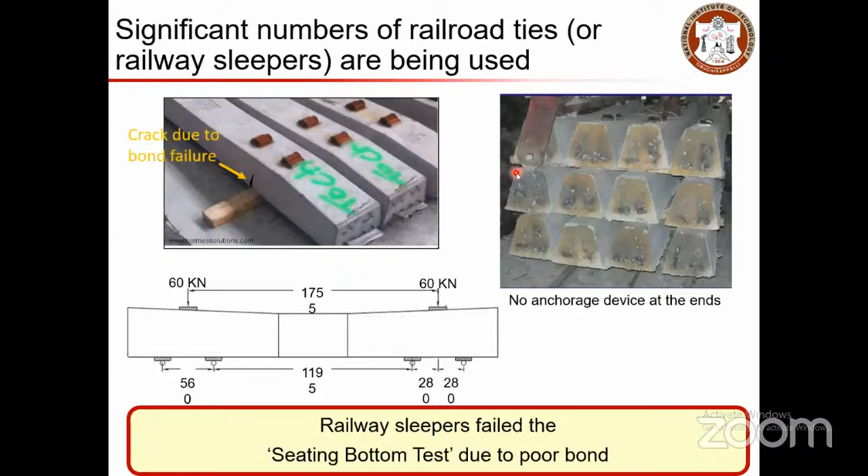Similarly, this is the case for railroad ties. The only difference is that the diameter of the strand used in railway ties will be lesser than the one used in bridge decks and buildings. Even in these railroad ties, we have observed a lot of issues, such as seating bottom failure due to poor bond performance. What we observed is that the bond mechanism in pre-tension concrete systems is mainly governed by adhesion, friction, and mechanical interlock. When you talk about strands, mechanical interlock plays a major role.

The difference between plain wire and strand is that with strand, after the peak, the resistance to slip is enhanced. In friction, the effect is due to the wedge action at the end, which creates a Hoyer effect that enhances confinement, and you also get mechanical interlock. So the helical shape of the strand tends to increase the strength.

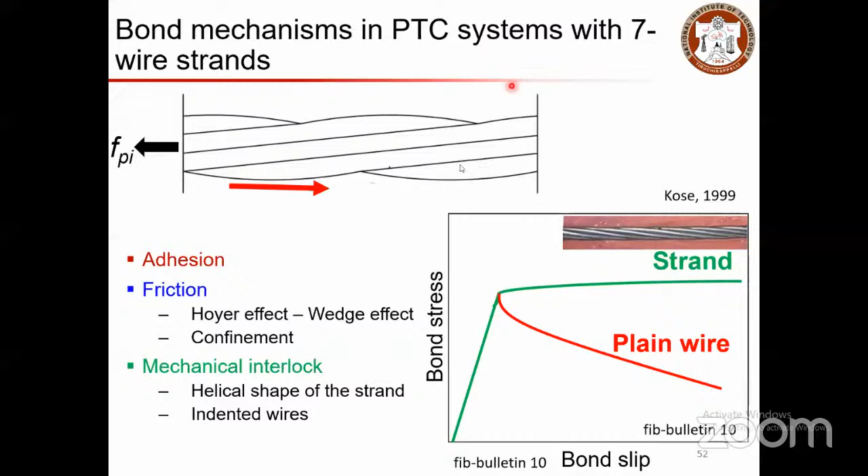In pre-tension concrete system, you have a bed and a stand, and you stress using the jack. The stress is transferred slowly from the end to the member over the length. That length is called transmission length, the length required to transfer the stress from zero to effective pre-stress.

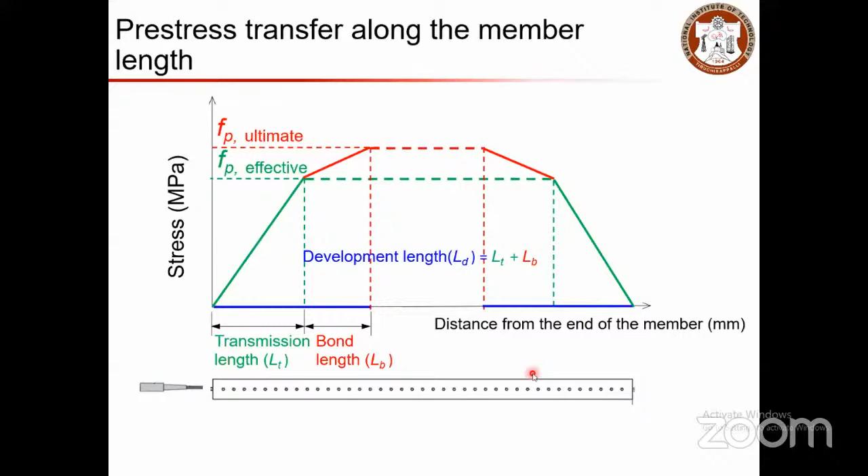Now this structure is exposed to the environmental service condition. Under service condition, the stress will be activated, and there will be an increase from effective to ultimate stress. The length required for reaching effective to ultimate is the bond length, and the length required to reach the ultimate stress is the development length, required for complete utilization of strength, especially for the flexural member.

Inadequate bond will result in increased transmission length, and when it is increased, that will reduce the shear and flexural performance in the critical regions. Especially at the ends, the anchorage reinforcements are crucial, and that depends on the transmission length of your member.

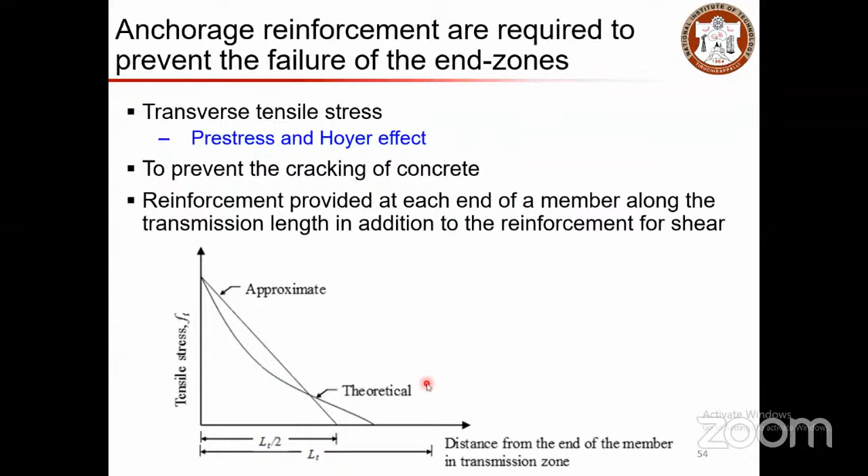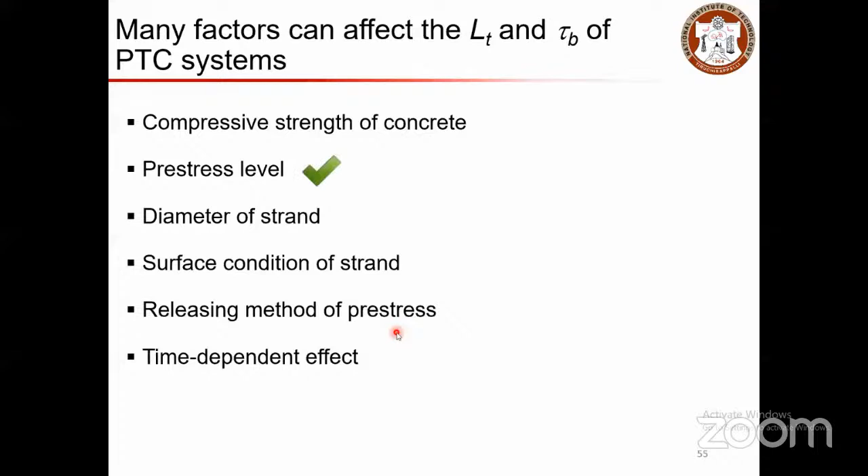The major factors that influence the transmission length are the compressive strength of concrete, stress level, diameter of strand, surface condition of strand, releasing methods, and time-dependent effects. But when you consider the coded recommendations, not all the factors are considered, especially the Australian, Canadian, and Indian codes, which talk about transmission length with respect to only the diameter of the strand.

So if you change the concrete strength, or any one of these factors, you end up having the same transmission length, but the real scenario is not the same. So using these equations is not appropriate, whereas the Euro code and FIB code consider all the factors that would influence the transmission length. Adapting this would be more effective. But then we need to look at whether the factors considered are good or bad.

Sometimes we tend to add more factor of safety so that if something goes wrong, there will be something to take care of the structure. That's how the design code works. But that is not always true, and especially for the pre-tension concrete system, we should not work from that point of view. I will tell you why.

In pre-tension concrete system, underestimating and overestimating are both crucial. Of course, we should not underestimate the required parameter, or we will be short of the safety factor. Whereas when you overestimate it, we think that is adequate to provide enough safety, but that is not true for the pre-stress case. Here is the scenario collected from the literature and research.

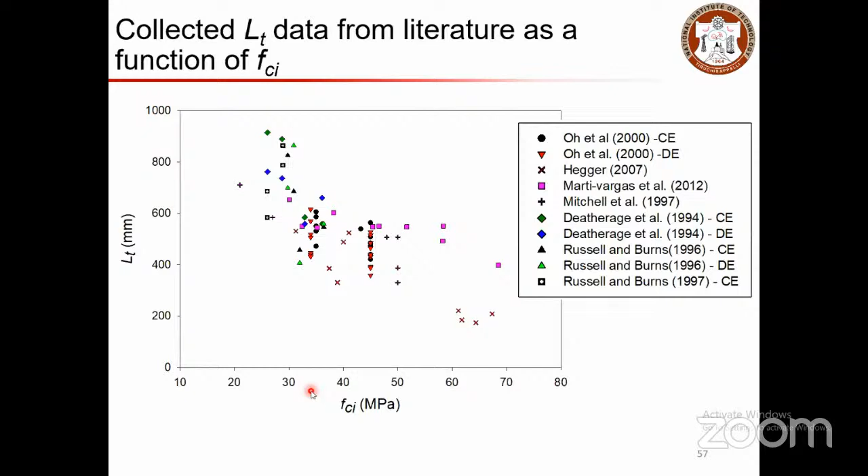From there, it indicates that compressive strength has a significant influence on the transmission length. Likewise, surface condition also has a significant influence on the transmission length. And I'm talking about the transmission length.

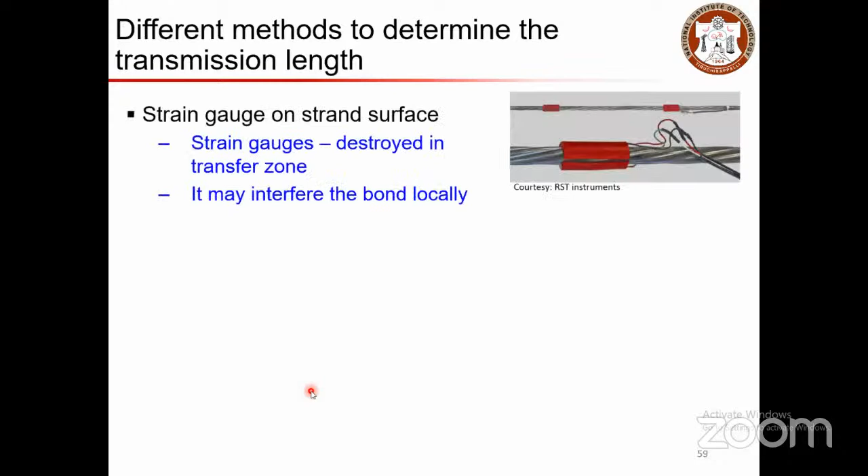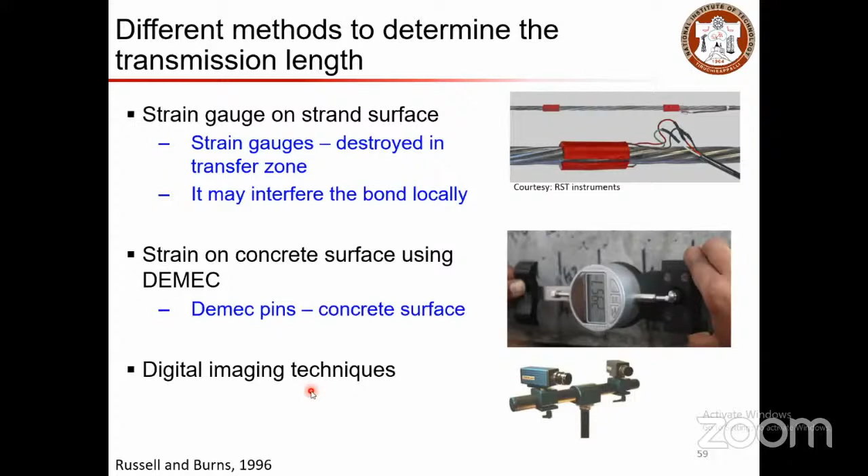I'll tell you how to measure the transmission length. Basically, you measure the strain on the concrete surface, using strain gauges, or Demec pins, or DIC techniques. From this, you measure the change in distance, then calculate the strain and plot the graph.

I'll illustrate the sequence of the process used to prepare these specimens. You have a pre-stressing bed and a mold placed. Then you pre-stress the strands using the hydraulic jack and other accessories required to activate the stresses, and you concrete it and cure it. Then you cut the sample.

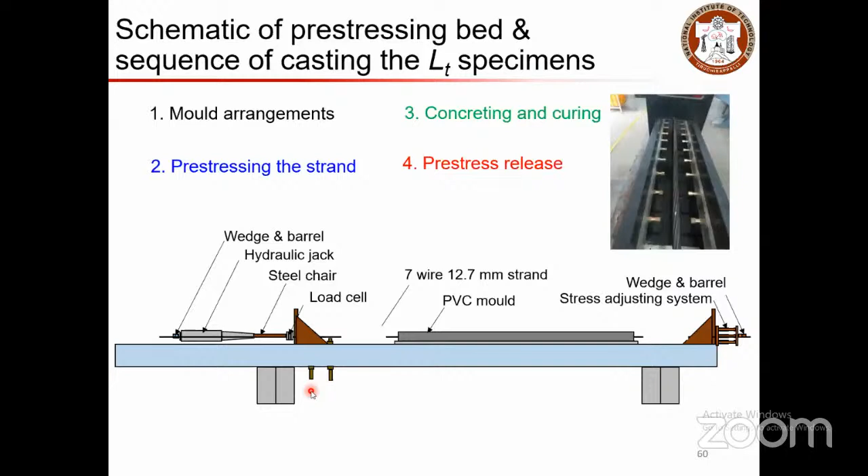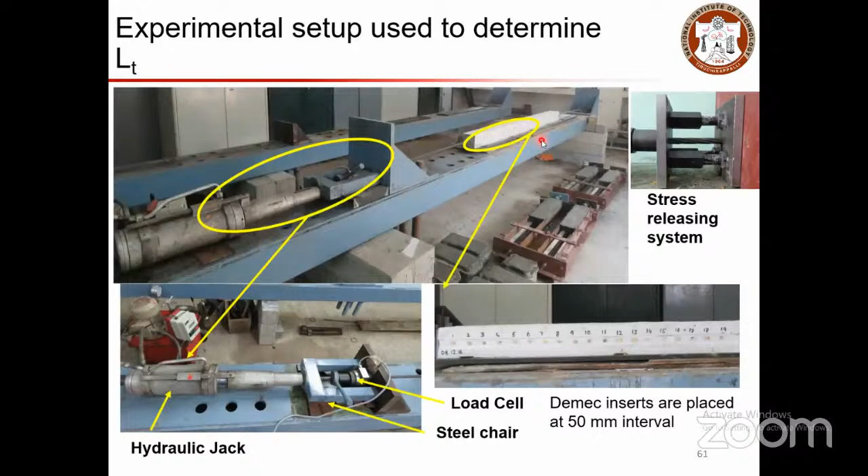In this method, I placed inbuilt Demec pins, required to measure the strain on the concrete surface. You do not measure the strain directly, you calculate the change in distance and then calculate the strain. These are the ways in which strains are obtained.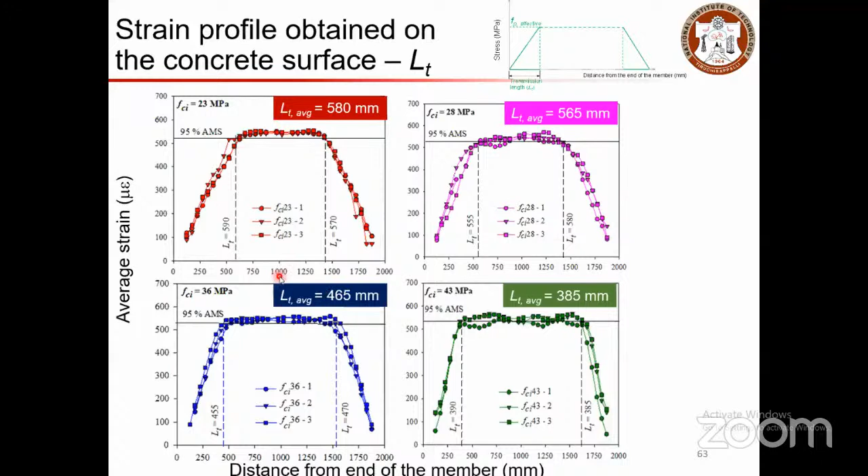From the obtained result, you can see the 95% average maximum strain method is used to get the transmission length using various strengths of concrete. This is summarized in this plot, which indicates that when you change the compressive strength, the transmission length gradually decreases. From 23 to 43 MPa of the strength at the time of release, the reduction is about 36%.

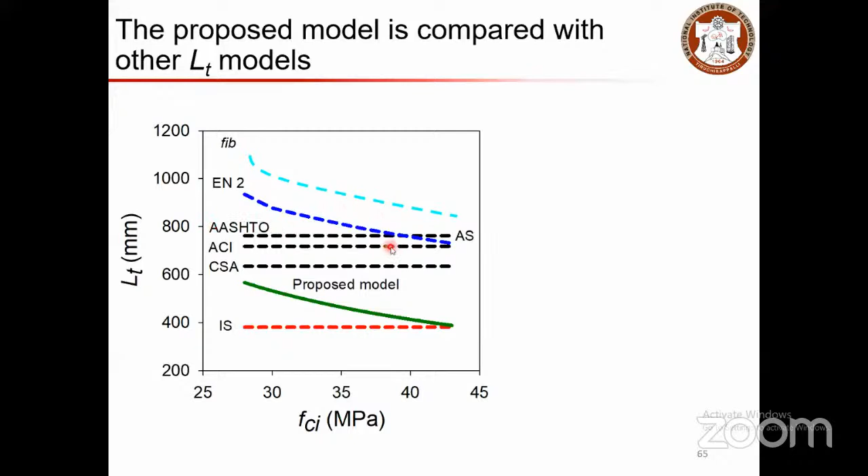From the comparison, it is understood that our Indian code significantly underestimates the values, and there are codes that overestimate the values, but that is not constant and not reliable all the time to go with. So, underestimation and overestimation of the transmission length is not always good for the pre-tension concrete system. Let us understand how the bond mechanism is being affected.

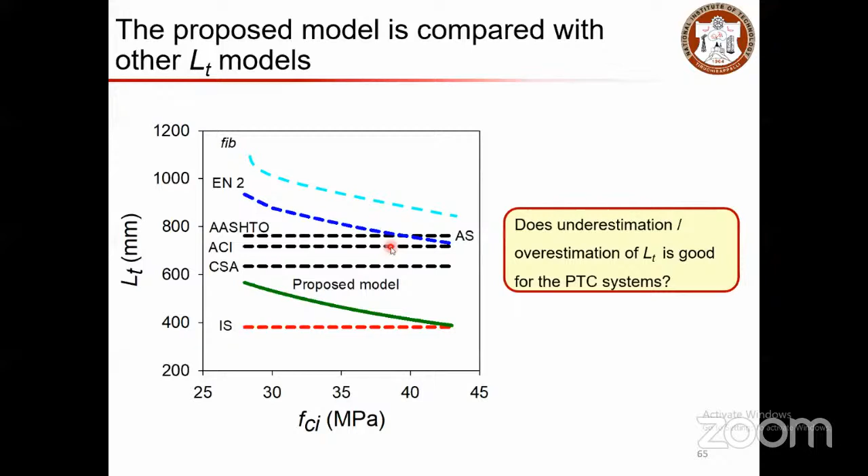For conventional strength concrete, we can determine bond strength by a pull-out test, casting a simple cube specimen with embedded rebar. This is placed at one end, and a pulling force is applied to try to pull the rebar out from the concrete. The bond failure criteria used for rebars are 2.5 mm slip at the free end, which is measured.

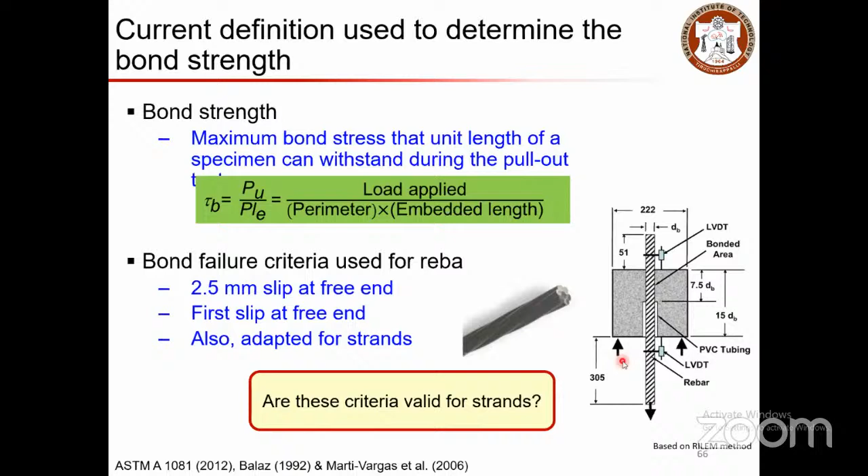Can these methods be adapted for strands? It cannot be adapted. Researchers worked on several methods to come up with a specific test methodology for pre-stressed concrete. The Moustafa test method uses a complete concrete block in which strands are embedded, and a jack is placed to pull out the strand. But the disadvantage is that the strands are not pre-stressed.

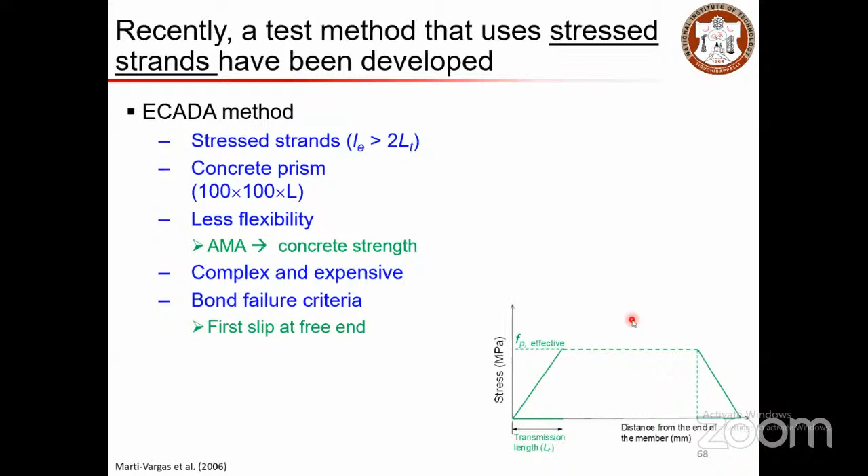So it is adapted as an anchorage measurement access method. This setup basically replaces the stiffness of the entire remaining length of the specimen. This involves a lot of complications and is expensive as well.

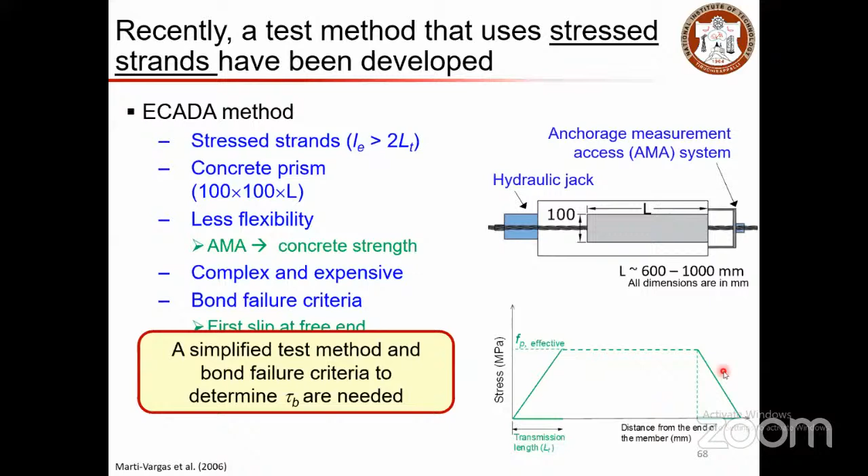So we decided to come up with a simple test method for determining the bond criteria. Based on that, the proposed simple test method uses a 1 meter long prism specimen cast with a stressed member, with a stress level of 0.7 FPU.

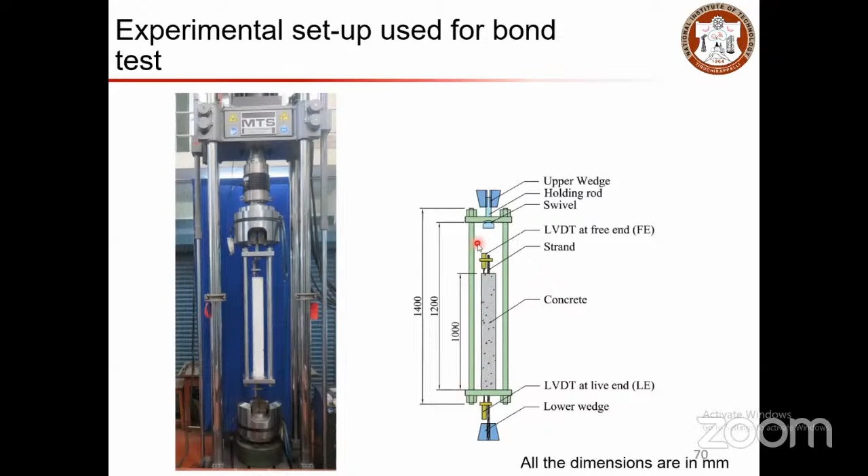The whole setup is placed in an MTS machine to do the pull-out test. This end is fixed, and as it moves, the strands are pulled out from this end. Two measuring devices are placed at the ends to measure the slip at the ends of the members.

Two different pre-stress levels were considered, and two different embedded lengths were considered. From the testing, we understood the behavior of the strands in concrete, and from that behavior, failure criteria for the test methods were proposed.

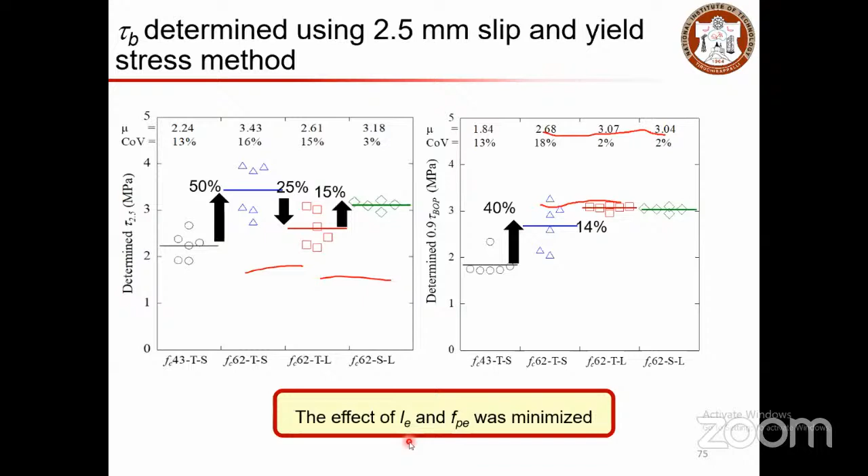When we use the effect of LE, the defining method is very good. Instead of 2.5 mm slip, you consider the change in point where the behavior changes. By considering that, we could eliminate the effect of total embedment length, and we can eliminate the effect of pre-stress. So those things could be minimized.

If you look at bond strength definition using the 2.5 mm slip method and the yield stress method, both are giving almost similar results. When using the 2.5 mm slip method, the hollow regions basically represent the 2.5 mm slip method.

The effect of the length or compressive strength cannot be ignored. Whereas if you consider the yield stress method, there is a bend-over point to consider the change in moment, and then the effect of the length and pre-stress levels are minimized. So in that case, the scatter is also lesser, and the effect is also achieved better.

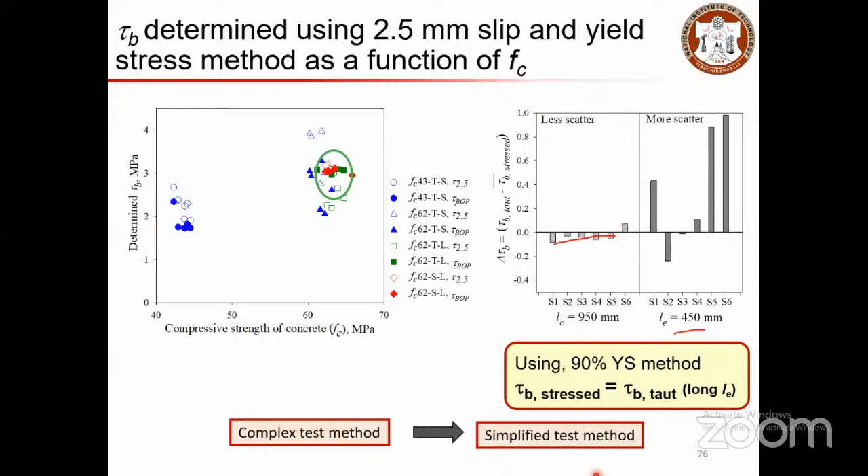So from the complex test method, we could propose some simplified test methods using this 90% yield stress method. And from this, we could also understand some bond failure criteria at the interface.

For helical shaped strands embedded in concrete, the bond failure is different. A shear key is formed, and as the strands are pulled out, these shear keys get deformed, partially cracking at the initial stage. Eventually the shear keys are completely cracked, resulting in a pipe formation through which the strands pass smoothly. This damage of the concrete key creates a smooth path resulting in pull-out failure.

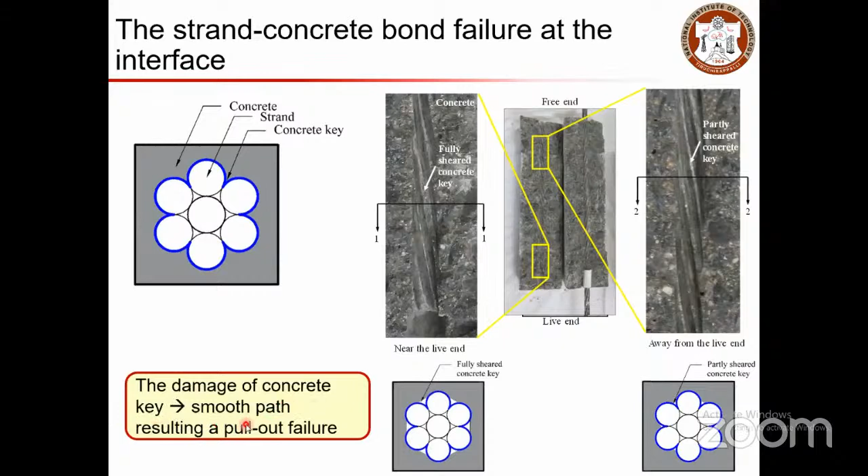To summarize, we looked at several modern techniques that enhance concrete properties, material specifications and testing specifications required for steel rebars as well as FRP rebars, the use and application of PTC systems, and test methods for bond testing for pre-tension concrete systems, including how to reduce the complex method to a simplified standard test method.

Okay madam, the majority of the images you are showing are very good, but as I watched, you mentioned the years too. I think some images are from around 2000 to 2013. Already one decade is over, madam. So after that, is there much improvement made?

Yes, sustainability is something that we give attention to in recent times. We really need to work a long way to reach there, so we need to do a lot of research and come up with findings to update things. A lot of participation from industry and academia should take place to enhance it further. In India we really lag certain things compared to developed countries, so we are learning the good practices adapted there and trying to implement them here.

In the next 5 to 10 years, you can see a huge transition in the construction industry field.

And in the case of 3D printing concrete also, I think it is now economically viable. It is already economical, you have to think of the holistic service life of the structure, not just initial cost alone. I saw one image where you posted the Indian Post Office, which is 1200 square feet and the cost is around 27 lakhs.